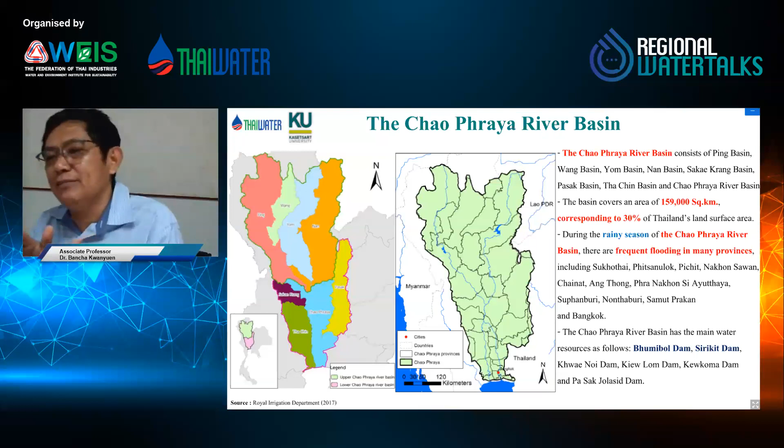The total area of the whole basin is 159,000 square kilometers, and you can see it's 8 major river basins combined together to form Chao Phraya.

In terms of rainfall here, it's about 1,000 or a little over 1,000 millimeters per year. That's not so much compared to the average rainfall of Thailand, which is about 1,300 to 1,400 millimeters. Over the 8 basins combined to be Chao Phraya, the rainfall is not so much different.

But if you look at the runoff, you can see that the Nan River contributes a lot, about 7 billion MCM, million cubic meters. That's a lot. And the next one, in pink, is about 11 billion MCM.

That is a major tributary that keeps the water. The other ones combined still don't contribute so much water.

Next, that is about the supply. This is the demand side. The lower one in brown color is the demand side, which you can compare here.

You can see that the supply side comes from the Nan River and the Ping River in the north, but the demand side, shown in brown on the right hand side, is on the Chao Phraya and the Tha Chin. Chao Phraya is Bangkok actually. The Chao Phraya River flows through the heart of Bangkok, then Samut Prakan, and goes to the Gulf of Thailand.

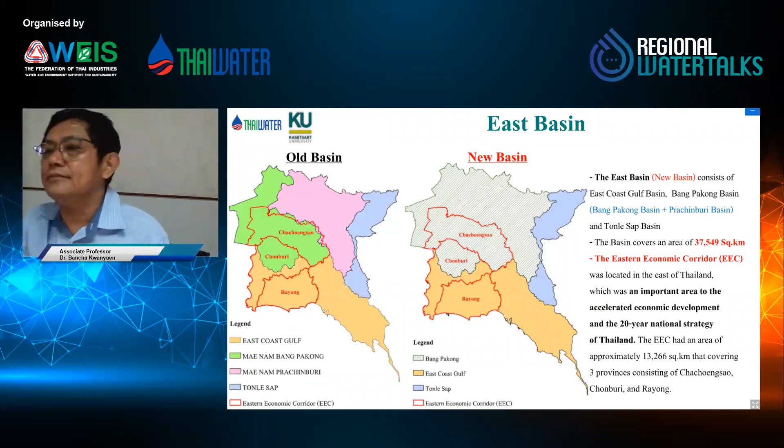This is about the rainfall. Compared to the northern or central part, the rainfall is much more, about 1,700 millimeter per year. The eastern part, Trat and Chanthaburi, you can see in the map shows Chanthaburi, the rainfall is much more there, actually about 2,000 or maybe more. On the western side, that is Chonburi, about 1,000, a little bit more. Not so, but on average it's about 1,700 millimeter per year. The annual runoff is about 18 billion cubic meter.

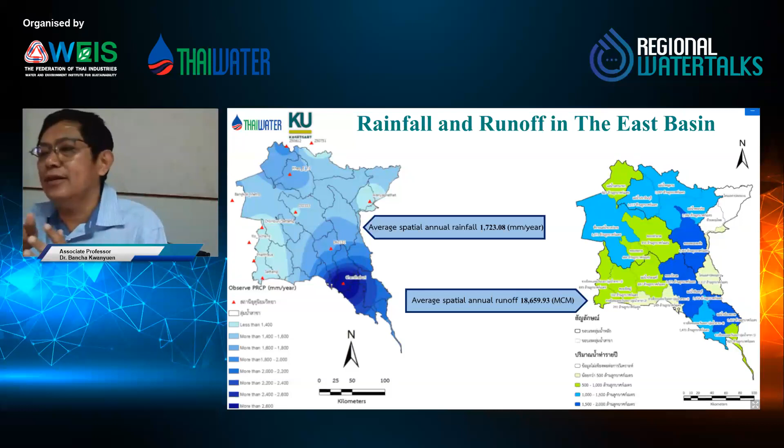Altogether, next please. This is about the water demand. The water demand is different from the other regions of Thailand. Agriculture is about 3 billion. Industry is about 1 billion. Domestic supply is about 500 million, and another 500 million for ecology or natural resources. So altogether we use about 5 billion cubic meter per year.

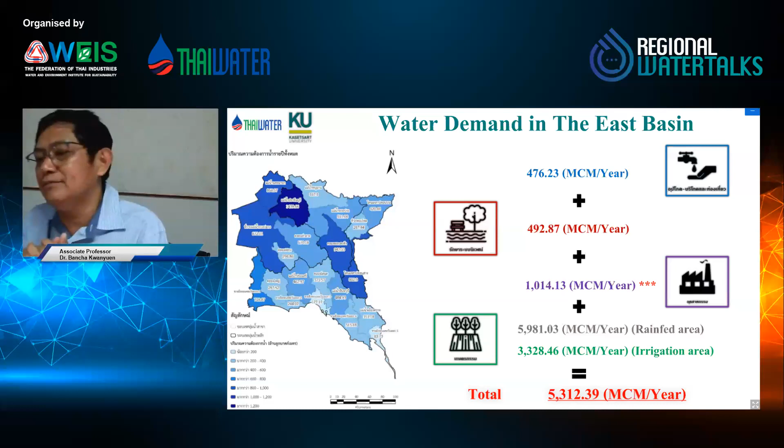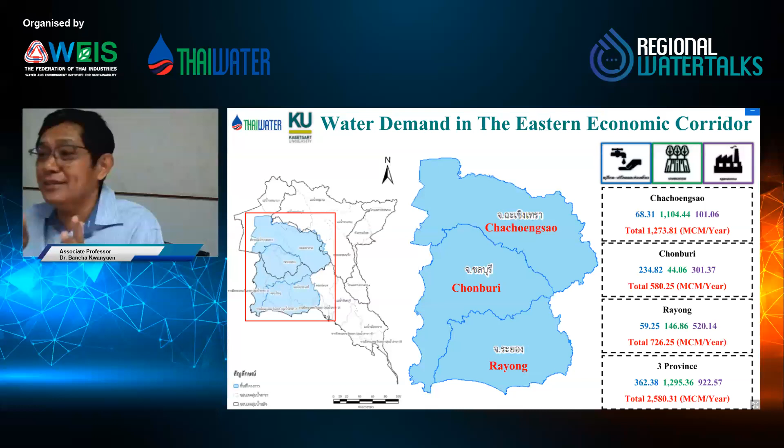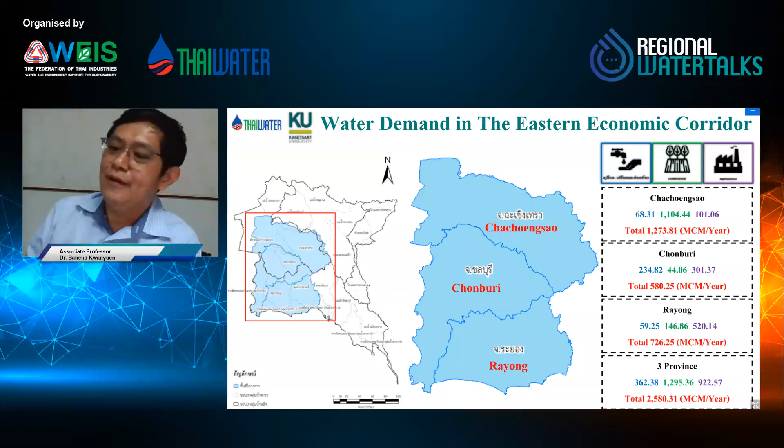Let's talk a little more about the EEC, because I have done a lot of work on the EEC in the last couple of years. Here we give more detail about the water for industry, domestic, and agriculture. Rayong is a good example where industry is very important. It's the highest industry use, about 500 million, agriculture maybe only 150 million, and domestic supply only 60 million. The other one is Chonburi, where industry and domestic supply are not so different, 300 for industry and 234 for domestic supply, and agriculture is less. It turns out a different story where the majority of use is for agriculture, not so much for industry or domestic supply, and altogether it's about 2,500 million cubic meter per year. Okay, next please.

We have a little water shortage in Chonburi, or the East Gulf sub-basin number 1, that is Chonburi or Rayong, but this has been solved by the pipe network. I didn't show you the pipe network here, but actually the eastern part of Thailand, the EEC area, has a very dense pipe network connecting most reservoirs together, connecting the industry area and the urban area with the reservoirs and with another river basin, diverting water from the Bang Pakong and the Chanthaburi area into this area. So far we have no water shortage because of water diversion in this area.

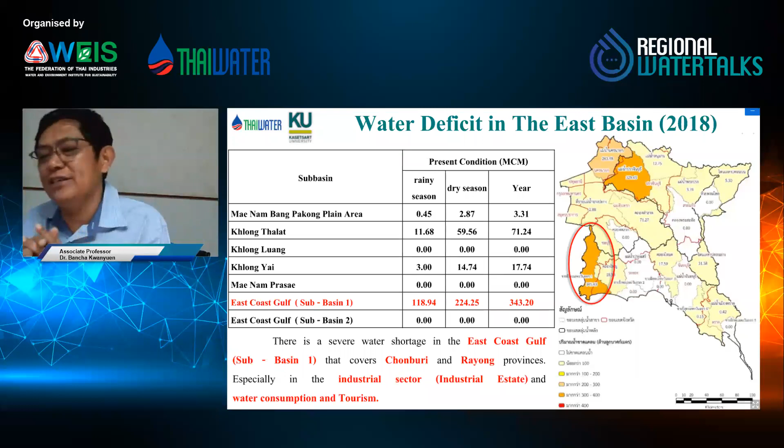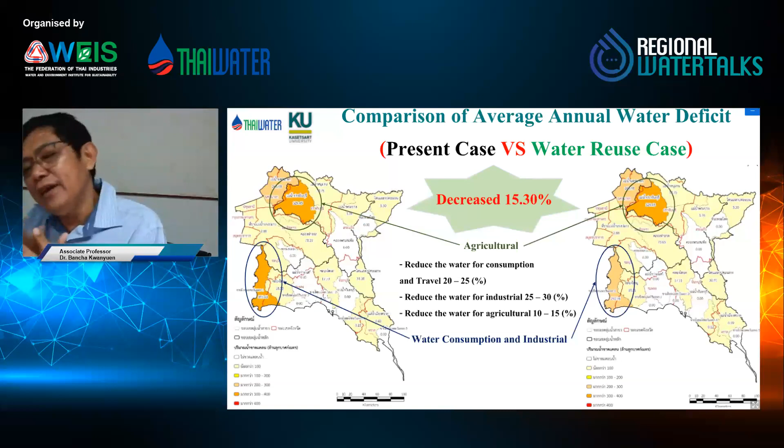That is very important, because if we cannot do this, we have to divert more water from the nearby basin, from the Chao Phraya or from Bang Pakong or from the Chanthaburi area on the eastern side of the EEC, and Bang Pakong and Chao Phraya on the western area. In addition, if we cannot match the supply with the demand, desalination will be another option. We already studied that and have done that, so we have no problem. In the next 5 years, if we cannot really reduce water use, probably desalination will be the solution. Okay, next please.

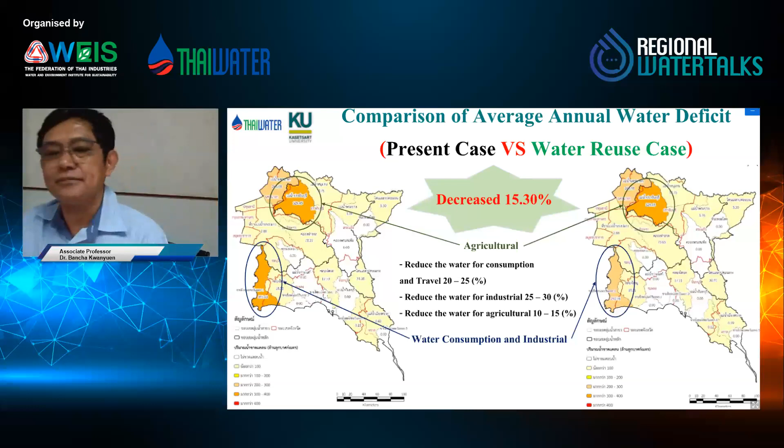Okay, this is moving forward to the north and northeast of Thailand, which has tributaries of the Mekong. You see the Khong, Mun, Chi rivers in the Northeast Khong basin. This area actually has sandy loam soil, so for agriculture it's less suitable compared to the central plain and even the east.

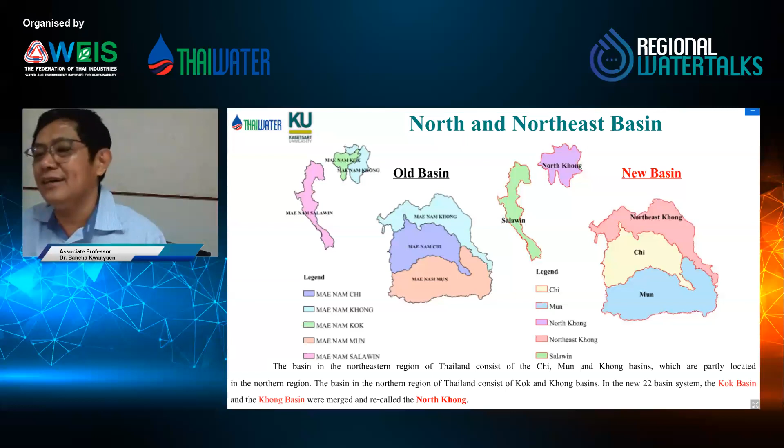But this area has water shortage. Why? Because this area is a plateau, and it's not so easy to construct dams or reservoirs. Next slide, I can show you. You can see here we have water demand and runoff. The demand and runoff seem to be sufficient, but actually we have water shortage, just because we cannot construct reservoirs here.

Like the Mun river, we have water shortage. The Chi also has water shortage. But the Khong may be a little bit better - we can divert some water from the Mekong River, but there's still a little bit of water shortage.

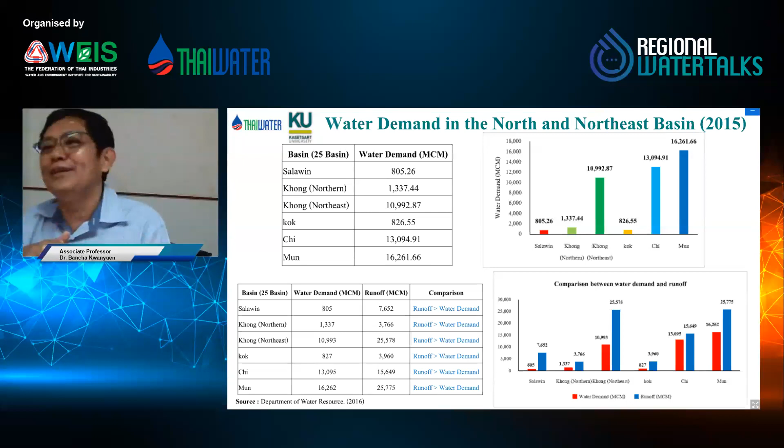Okay, that's most of the north. I didn't talk much detail because it's mostly agriculture. Maybe most of you are more interested in industry, because industry in this area is mostly medium scale or small scale, not so much heavy industry or big industry.

Okay, next please. The southern part is the new movement of Thailand for new industry area. From this picture you can see that from number 18 to 21 to 22, this area has good rainfall compared to other parts of Thailand, because on the east is the Gulf of Thailand and on the west is the Andaman Sea. So it connects to two oceans - one is the Pacific Ocean, the other is the Indian Ocean. That's why we have a lot of rainfall in this area.

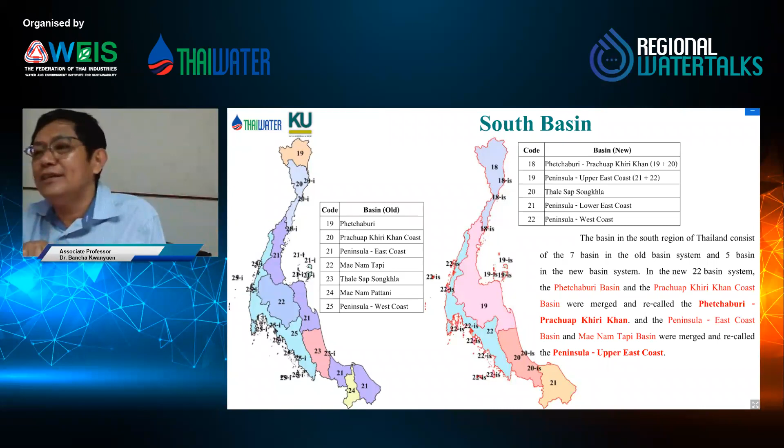And that's why in the future we plan to develop the south to have a bit of industry, and some other area like a port or other things.

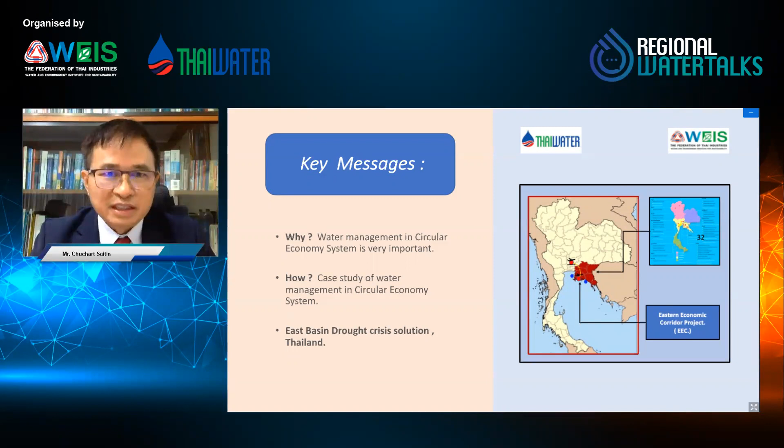Secondly, my message is to share about water management in the circular economy system in the industrial park in the area of the East Basin. The third is, may you understand the solution of the East Basin drought crisis in overall management, that collaboration between the private sector and the government to overcome the crisis in the future. That is all my message, focused on the Eastern area, the Eastern Basin.

Next, I'm talking about the East Basin. You can see that in Thailand, there's increasing demand. In my view, we have many projects developed by the government that promote industry and tourism, to raise the income level of Thailand from a middle income country to a high income country.

These projects include developing the Suvarnabhumi Airport and U-Tapao Airport, to increase capacity. There are two deep sea ports in this area, the Laem Chabang deep sea port and Map Ta Phut deep sea port, with a high-speed rail connecting Don Mueang International Airport, U-Tapao, and Suvarnabhumi Airport together. All these projects will result in increasing population demand in water consumption in this area in the future.

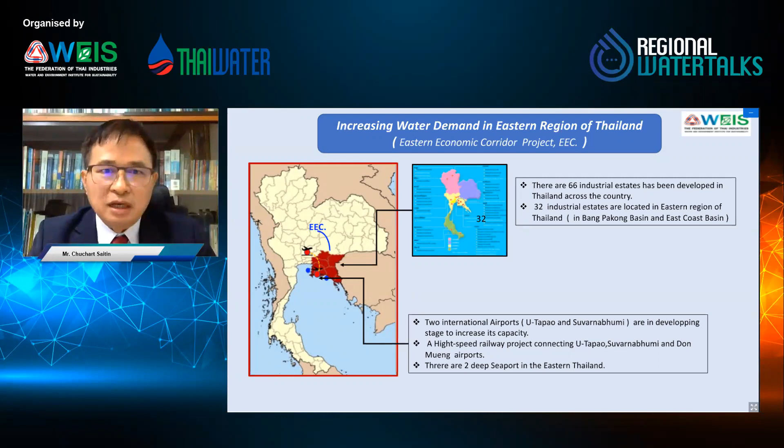This is, in my view, why water demand in this basin will increase a lot in the near future. Please go to the next slide.

Talking in terms of the supply side, I'm talking about the annual rainfall and cycle of drought crisis in Thailand. I started working with Amata Corporation to develop the industrial park since the year 2001. Actually, this industrial park started development 10 years before I joined this company.

But in the year 2005, after the first drought crisis happened when I came to join this company, it was really bad, because in the middle of the year, the stock of water in storage became only around 10 or 20%. It almost ran dry, but that year the rain was forecast to come another 4 or 5 months later, in September.

So that was a very, very severe crisis in 2005. You see in the chart, this is the record from the meteorology station in Chonburi; the focus area shows that every 4 or 5 years, the minimum rainfall will come back as a cycle of drought crisis in this area. So that made me have a point of view that we have to overcome this crisis in terms of long-term prevention.

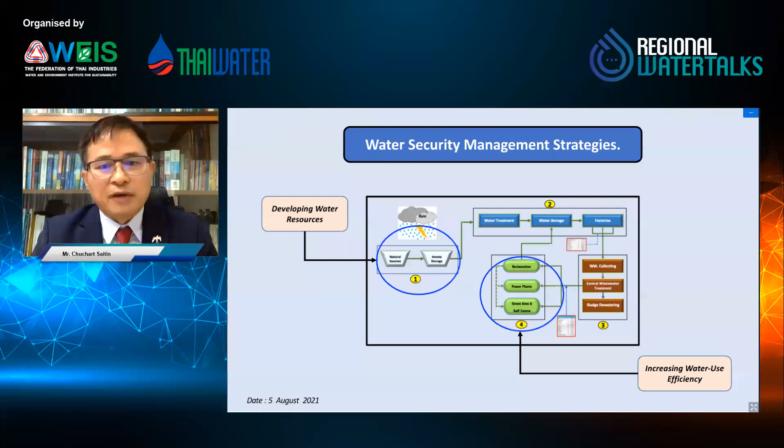We go to the second strategy. As Dr. Bancha told in the previous presentation, the way to have more security in the eastern part involves driving water demand with many projects from the government. So we have to survive by increasing water use efficiency in the industrial park, which I will explain next.

Next, the first strategy: water resource development plan. In this plan, we studied the kinds of water sources we can develop for industry. The first is surface water, which has the lowest cost of water use. Second is groundwater, which is very limited in quantity in eastern Thailand. It was just studied that there is only a big basin in the Ban Khai district that is not yet developed, but the study shows there is a big basin there.

Third is to increase water use efficiency, which we are using currently. In this time, the water safety solution system involves investigation and study by the government sector to develop a desalination system, seawater desalination, to make the highest security for all sectors in eastern Thailand.

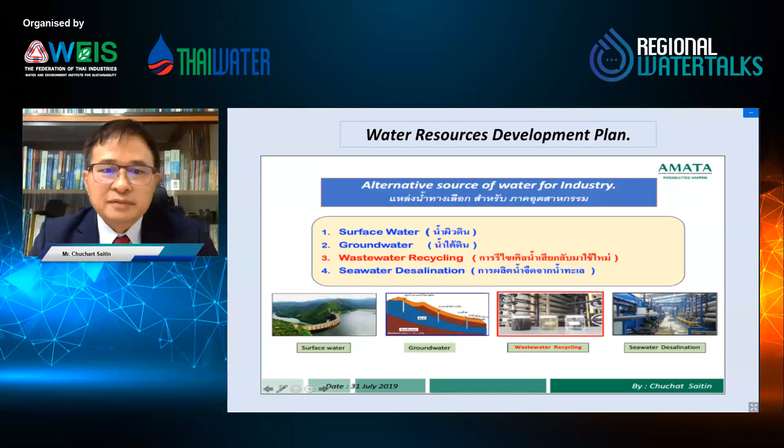Next. At Amata, the transition of water management to a circular economy system increases water usage efficiency. In the past, before we faced the drought crisis, all industrial parks generally managed water under a linear assumption.

The system draws water from water resources, produces, treats, and passes it to the customer. Then the customer in the park will discharge to the central collection system. Wastewater will go to the central wastewater treatment system and be treated to comply with the standard of water discharge to the public canal, throughout Thailand.

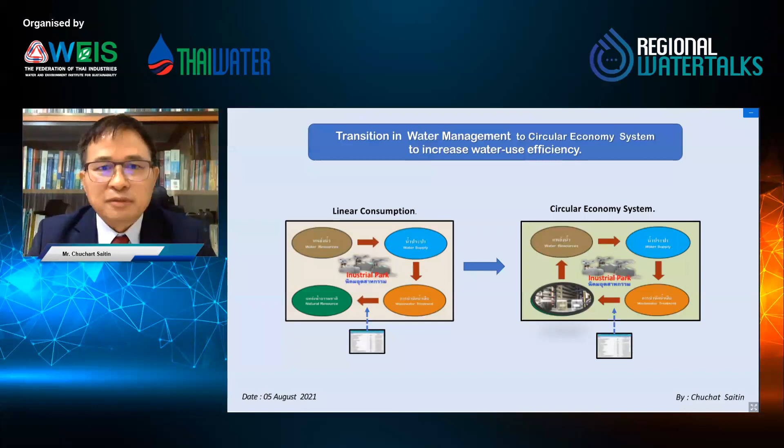Besides this, we were thinking about how to achieve high security of water management for all investors. So we changed the system into a circular economy system, where we collect all the treated wastewater into the wastewater reclamation system, using a reverse osmosis membrane system. This system produces water to supply back to the industrial park again. Let's go to the next slide.

We studied the record over 10 years of statistics and found that in Thailand, in two industrial estates - one where all wastewater is collected by the central collecting system - the amount of wastewater is 44 to 58% in Chonburi, and at Amata Industrial Estate in Rayong, it's almost the same, 44 to 61%. This is for industries like automotive, electronics, and coating. The amount of water discharged from the factory that goes to the recycling system averages about 50%.

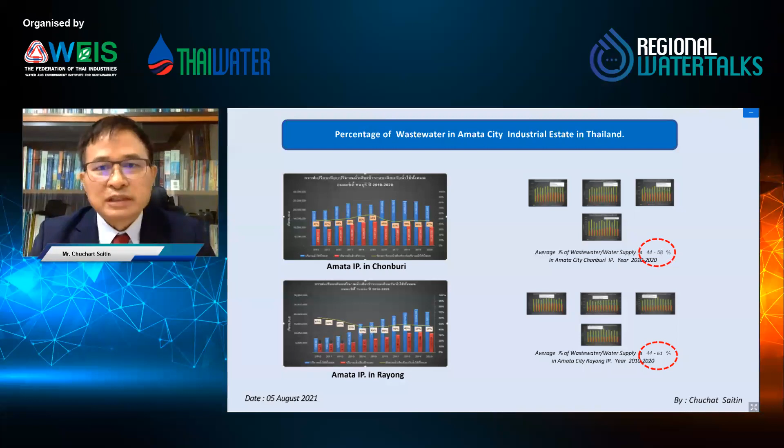Okay, next. In the wastewater management system, we started this way because in an industrial park it's easy to manage all the factories, since all factories investing in the park have the same system. They have to design the factory to separate rainwater from usage water, which we call wastewater. All wastewater is designed to collect and discharge at only one point to the central water system. This design is controlled by the Industrial Estate Authority of Thailand, which we call IEAT, and must be approved before getting the license to operate.

When operating, Amata has a system to do random sampling, checking the quality of discharge before it goes to the central collection system. This ensures that all wastewater is controlled to meet the requirements of the central wastewater treatment system, which we design to handle and treat until it meets the standard for discharge to the public canal. We then recycle this water to the cooling system in the power plant and to the green areas in the park. The rest goes to the RO reclamation system and is supplied back for industrial use in production.

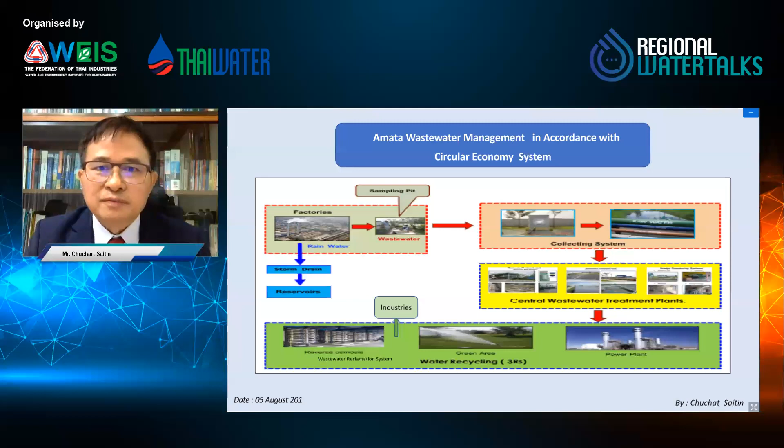Okay, next slide. This is the program I'm showing you in the model, which is resource management. We draw water from natural resources, and we also have reserves at Amata to keep water for the whole year.

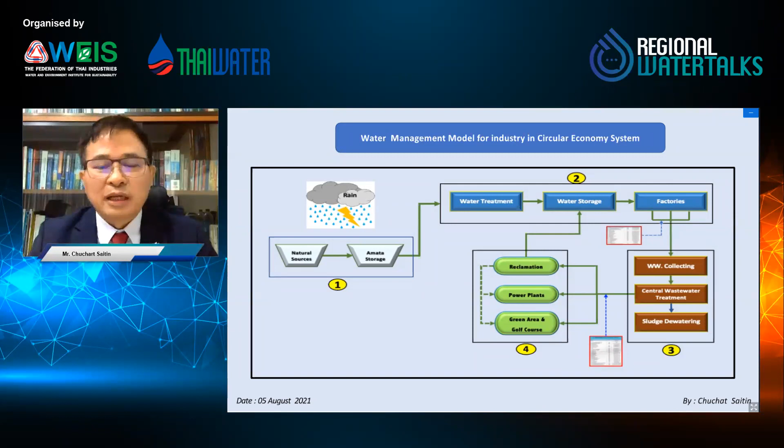This part is about increasing capacity and the efficiency of water use, reusing by integrating wastewater from the central wastewater system into the green area, the power plant cooling system, and then into the reverse osmosis reclamation system to supply high quality water for industrial use. This is the system that we plan to do. Please go to the next slide.

This is a sample of one station of the wastewater reclamation plant in Amata Industrial Estate. This figure shows the whole system. The water goes to the wastewater treatment system, and the final stage is the sludge dewatering system to remove sludge from the treated wastewater. All treated wastewater is pumped to the holding pond before being recycled for use in green area systems and power for the cooling system.

The water, second, to the treated water that we use for the RO reclamation system—the quality of water is very clean, better than the PWA standard. Normally PWA standard has turbidity control at 4, but the water that feeds into the RO membrane has to be less than one unit turbidity, so it's much better than the standard of PWA.

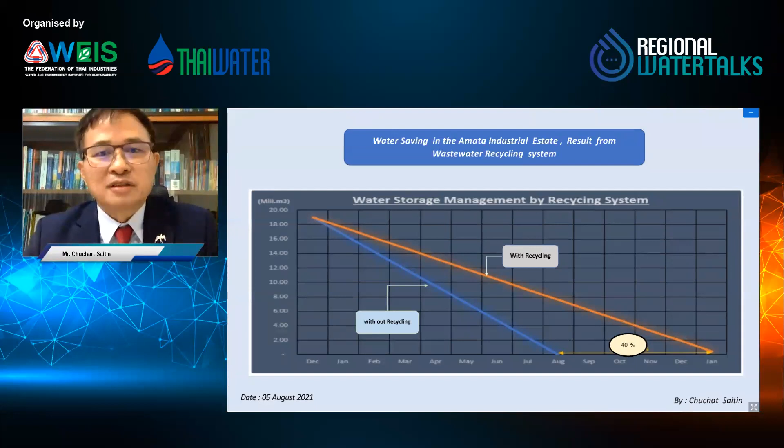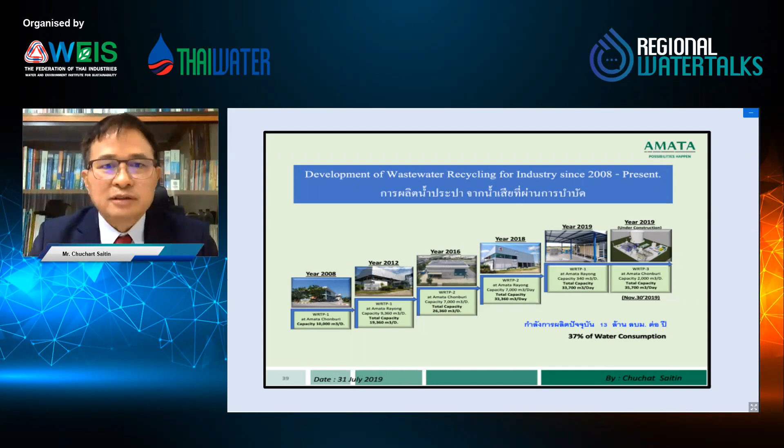This is the model I presented to the subcommittee of the House of Representatives for water crisis management in the eastern region of Thailand, to find solutions for the water crisis on the east coast. As Dr. Bancha said, we need collaboration between the private sector, government sector, and all sectors—including agriculture, private domestic consumption, industry, tourism—they have to be aware of the water crisis, its cycle, and how we can overcome it. Water usage efficiency improvement is one key success factor for solving the water crisis.

Because when we look at seawater desalination, it has high cost—consuming around 4 times more electricity for 4 times less water. Recycling water needs around 0.8 to 1 kilowatt hour per cubic meter, but in seawater desalination—based on my experience visiting Israel, Singapore, and Australia, where they do seawater desalination—the average is around 4 kilowatt hours per cubic meter of desalinated water. So we have to improve water usage efficiency before moving to seawater desalination systems.

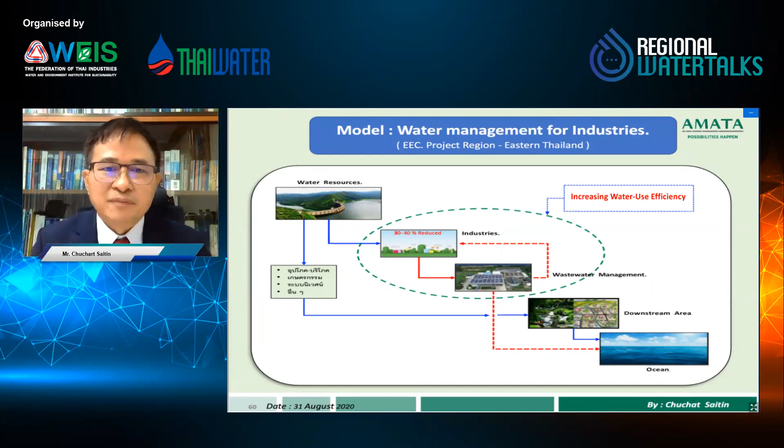I think this is coming to my last slide. I just want to tell you that we have the highest security system through the government—they have an official water resource body, the National Water Resource Agency, to manage the overall policy of water management in Thailand.

We also have a subcommittee to determine how to implement seawater desalination in Thailand for the highest water security in the eastern part of the country, supporting all the government's projects like developing seaports, increasing international airport capacity, and high-speed trains—all driving demand. But we have to ensure a mitigation plan to overcome the crisis by improving efficiency of water usage in all sectors.

In agriculture, we have to reduce losses in the distribution system. In industry, we have to implement the 3R system and circular economy to reduce water consumption. The private sector has to control demand and wastewater discharge into water resources that can be contaminated, reducing supply capacity. So the final key success factor is collaboration and public awareness of the crisis in this region of the country.

I'm going to spend today with you telling you more about this process, how it works, what the costs are, and what the standard issues are. But before that, it's good to zoom in a little bit on the problem at hand. We're a Dutch company, based in the Netherlands, in Europe, but we're globally exporting and currently active in around 20 countries. I think there's a good match here also in the Asian region, because when we look at water supplies these days, it's becoming less and less obvious that there's reliable access to fresh water. There's already 4 billion people that face water scarcity today.

And this number is only growing by nature. To me, access to water is the biggest challenge for humanity in the 21st century. They don't call it the oil of the 21st century for nothing.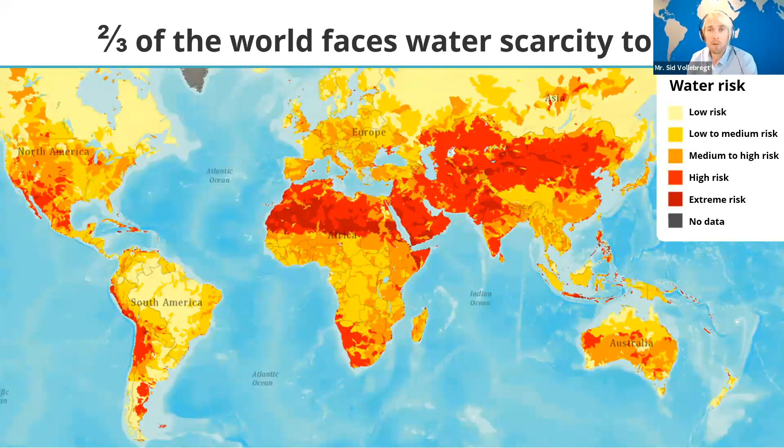It has to do with the increase of population. Of course, we have more people that want more water, they drink more water, but it's also in the food that we consume. Basically, food is 70% of our water footprint - to grow the coffee beans we consume in our coffees, or to grow the wheat that is eaten by the cow to be turned into meat. So it's not only the water we drink, but also the food we eat, the clothes we wear, the energy we produce, and all the products we have.

Currently, we use around 4 times the natural water cycle to provide all the people with enough water. That means all our natural water reserves are highly under pressure. Aquifers are dropping and salinizing, and wetlands are quickly disappearing. That's a big issue.

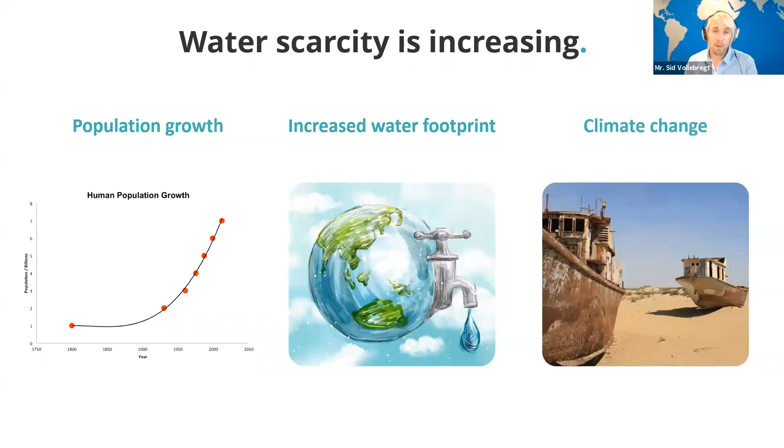And last but not least, there's also climate change that changes weather patterns. So we have longer droughts, and we have very strong rainfall in a short period of time, leaving the earth unable to capture this water. These three trends together make water one of the biggest challenges for the next decades.

But of course, this doesn't portray itself directly on people. When you think about how people are involved in this global phenomenon, it's often these kind of news headlines that make it evident that these days it's not a question anymore if there's going to be a drought in the dry season, but really who's next. There's always California, the Horn of Africa, the south of Europe, Taiwan was hit recently, Australia, and a lot of regions in Asia that are very pressurized when it comes to water supplies.

But fortunately for us, if we look at water availability, 70% of the earth is covered by water. From all this water, only 3% is fresh water, which means 97% of all the water is salt seawater. So looking at these numbers, we believe that the key to extra water resources partly lies in the sea.

And this brings us to desalination. Desalination is nothing new - it's been done for decades, but it's considered expensive because it's a very energy intensive process. And when energy is expensive, the water automatically becomes expensive. It's a process that has the perception of being fossil fuel driven, a bit dirty, because when we use fossil fuels for desalination, this also means we are accelerating water scarcity by increasing droughts. So we find ourselves in a vicious circle.

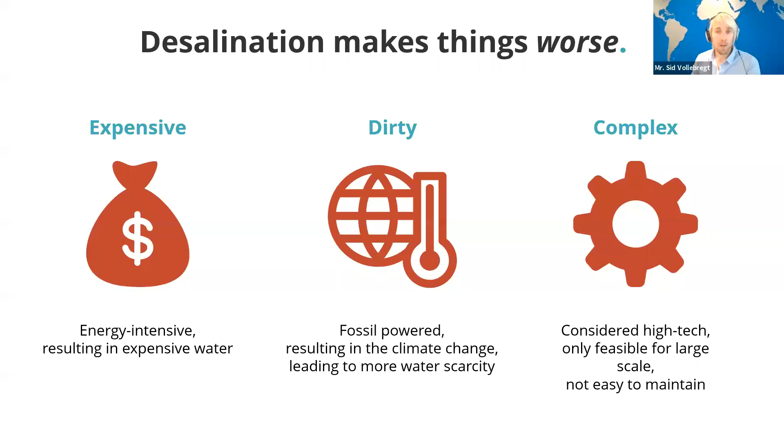And last but not least, it's also a process considered to be very complex, only feasible at large-scale factories in, for example, the Middle East, not being easy to maintain by smaller projects or local communities. These really are the 3 challenges that we as an organization took, and we asked ourselves: how can we get fresh water today without limiting tomorrow? This is the origin, this is the philosophy, these are the grounds of our organization.

And what we did is we developed new desalination technology that makes turning seawater into fresh water much more efficient. Normally when desalination is mentioned, we talk about reverse osmosis, which is the most energy efficient membrane-based process. It works by putting seawater under high pressure, 50 to 60 bars, and then having fresh water generated as the H2O molecules travel through the membrane. For this process, conventionally and traditionally, you need around 10 kilowatt hours for a cubic meter, and that's a lot of energy, of course.

And by doing so, we are able to use 75% less energy. We reuse the saltier water flow, we take its pressure, we provide it to the pump, kind of like a turbocharger. This allows us to use only 3 kilowatt hours for a cubic meter of water - that's 70% less energy.

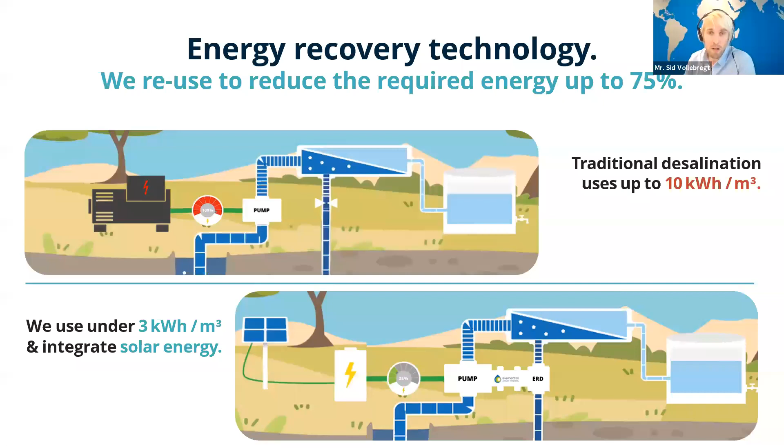The second step we do is we integrate this water treatment process into the fluctuating nature of renewable energy such as solar energy. So we are able to use the sun with a small battery bank to power this desalination process in off-grid locations. And due to this innovation, we also need 70% less panels. That's what makes it a major breakthrough, making freshwater at coastal locations possible for everybody these days.

So what we offer with our solar desalination technologies is, first and foremost, water at lower expenditure. When you have to transport water, it can be very expensive, so what we do is generate water on site at lower expenses. But besides that, we also make sure it's produced in a sustainable fashion using solar energy.

Reliability is very important because you cannot operate a resort, an industry, a community, or a private property without water. So reliability is of utmost importance. It has to be easy to maintain using remote monitoring and durable components - really high grade, not RVS steel because it erodes away within a year, but titanium pumps or 904L, robust materials. Durable components, automation and remote monitoring together are the key for a long-term and sustainable project that saves on water expenses.

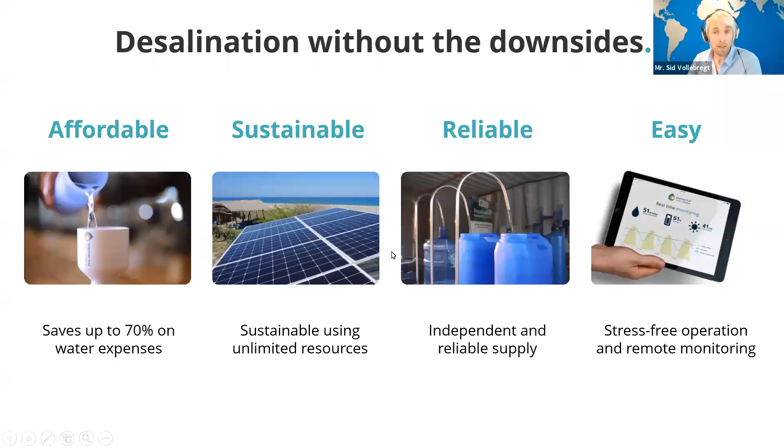So we think there's really a big opportunity here that we are happy to jump onto with the right local partners. When we dive a little bit deeper into the technology, we have 3 types of solutions we can deploy that can generate between 3,000 and 500,000 liters of water per day, so 3 to 500 cubic meters of water per day. That's the sweet spot that our organization operates in.

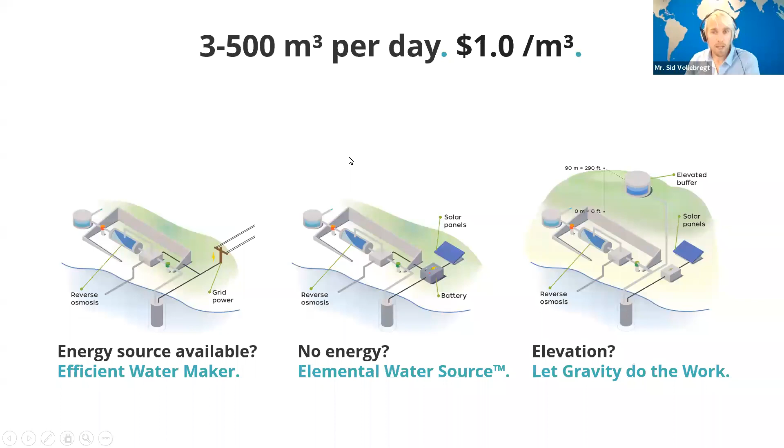We don't do larger plants and we only do seawater desalination, so only coastal applications. For these kind of numbers, you're talking about roughly $1 to $2 per cubic meter of potable drinking water generated. That's the range of investments you have to think about for all of these solutions. We have 3 different solutions that we deploy, so let's zoom into them quickly.

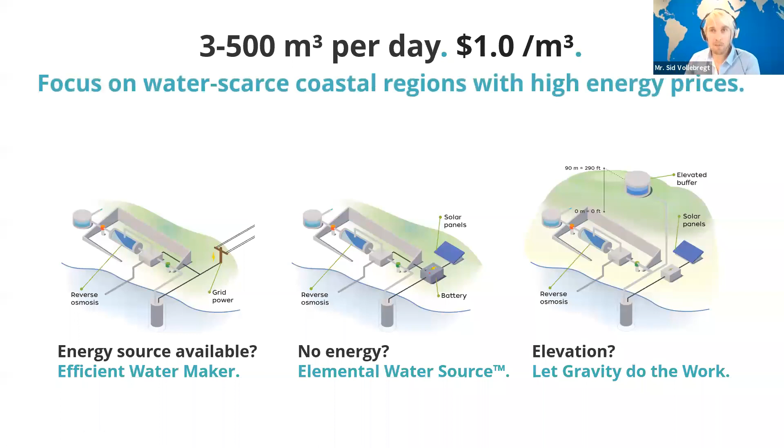They are all in water scarce coastal regions, and the payback is shorter if energy prices are higher. The first solution is only the water treatment part, the efficient desalination range we have. Here we deploy containerized or skid-built units. In the picture you see a project of 90,000 liters per day, the desalination device and the remote monitoring, and they only use 2.7 kilowatt hours per cubic meter.

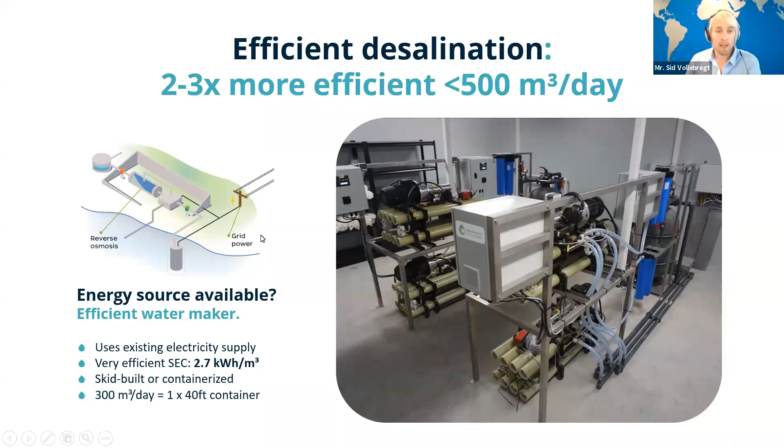This uses the existing electricity supply of the client. So if there's a resort, a community, or a private property that already has reliable and affordable electricity, these are the units we can deploy, either skid built or containerized. We can do 300 cubic meters per day in a 40-foot container.

Looking at the economics compared to conventional desalination, which has the perception of being expensive, here you see 2 lines of investment required over time. The conventional desalination systems have a little bit lower investment required, but because of the energy required, the operational expenses are quite high. Looking at our system, the light blue line, you see the operational expenses are much lower, leading to a short payback and strong savings over time.

You see that represented as well in the water tariff. If you calculate these numbers over 15 years, the amount of electricity for the traditional systems is much higher, so you're looking at $4 per cubic meter. But with our system, we're below $2 per cubic meter. This is for a system of 10 cubic meters per day, one of our smallest systems, suitable for example for a small boutique resort or a small community of a couple hundred people.

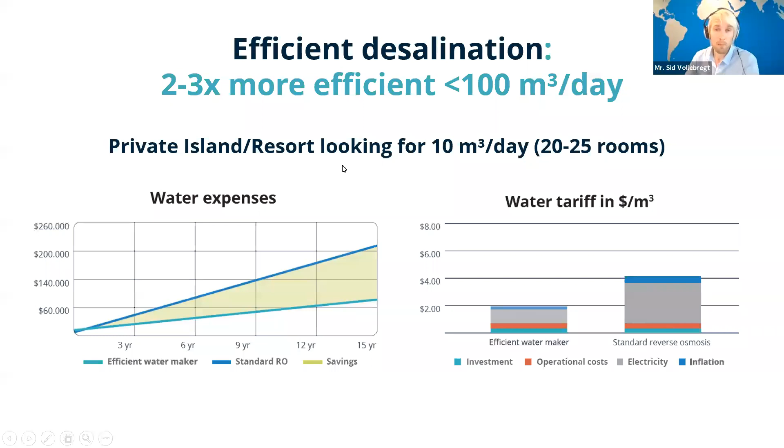When we transfer to locations that don't have a reliable electricity supply, this is the solution we can deploy. This is really an off-grid system called the elemental water source. It's a plug and play containerized unit. Everything you see on top of the container - the solar panels, freshwater tanks, the frame - it all fits inside the container, so it comes plug and play, ready to deploy.

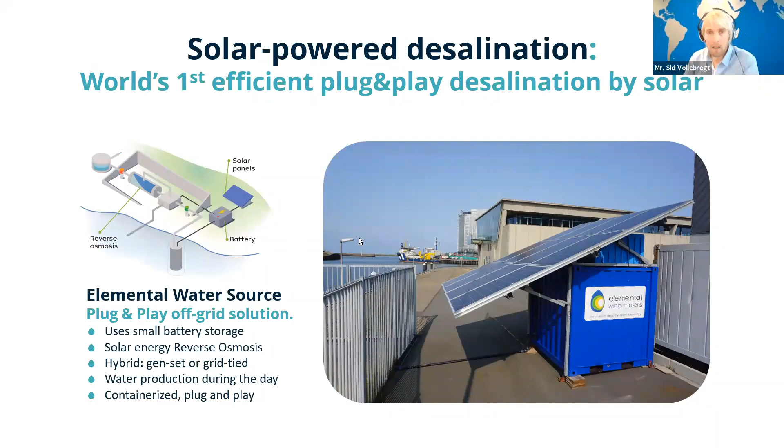I brought a little video with me that shows you a bit more about this process. Let's take a look at this video.

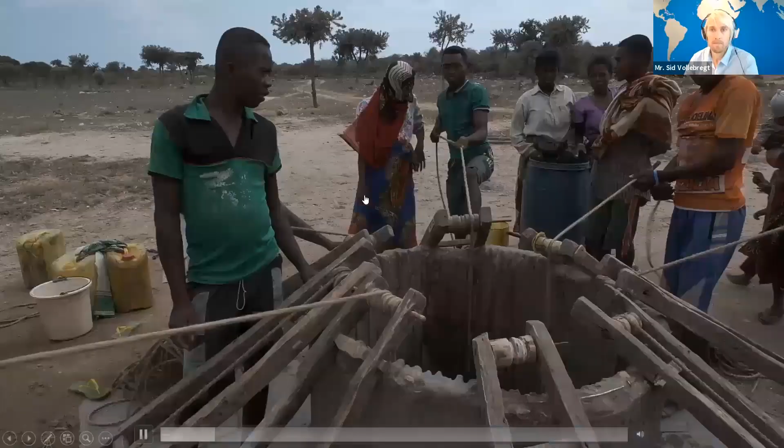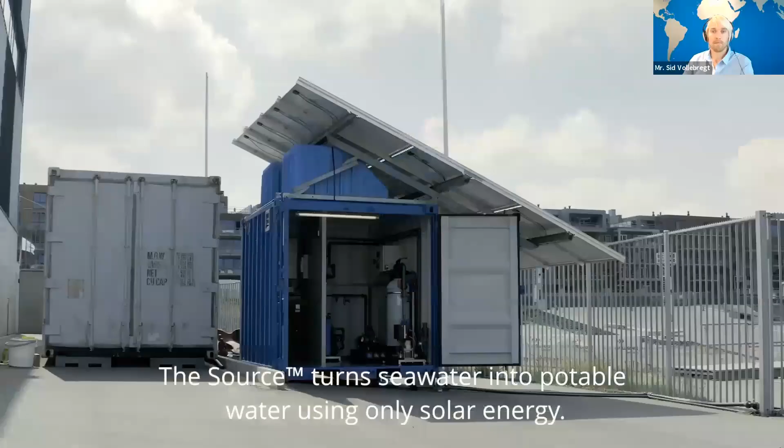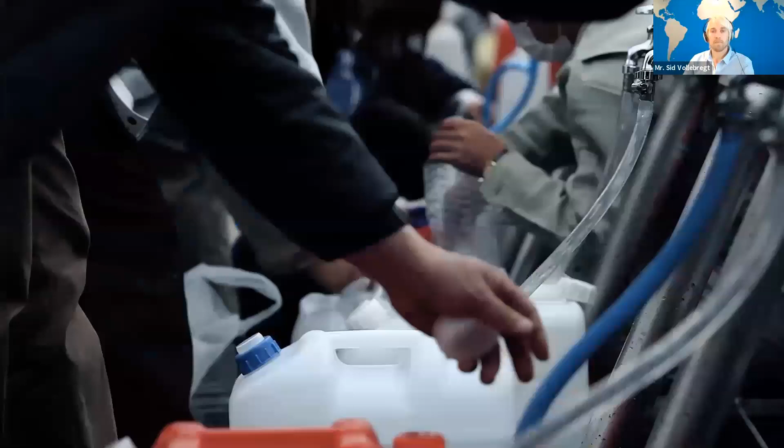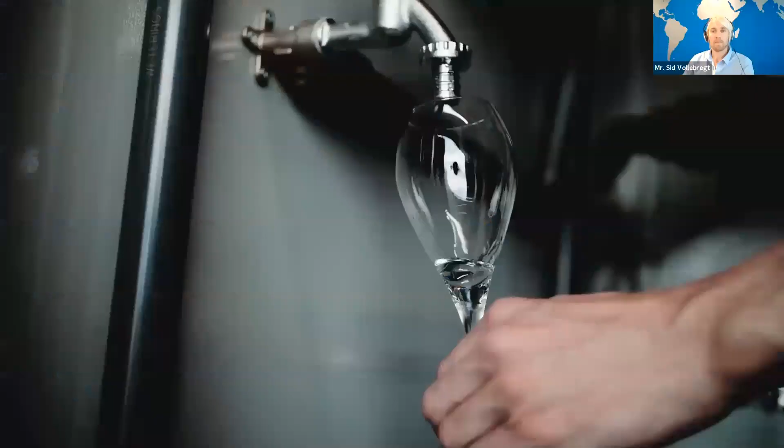Water is the source of all life. However, fresh water is getting more precious by the day. Many islands and coastal areas are facing water scarcity. How do we ensure sustainable access to clean water? At these coastal locations, there are two elements abundant: the sun shines over the vast ocean. This is where the elemental water source makes the difference. It offers an easy-to-deploy water solution for any off-grid location. The source turns seawater into potable water using only solar energy. It's the world's first efficient solar desalination solution suitable for quick deployment. One elemental water source provides sufficient water for off-grid users, such as communities, resorts, industries, or private properties. Due to rapid deployment and ease of operation, it's also the perfect water source for emergency response and disaster relief. It uses three times less energy than traditional desalination through unique energy recovery technology. This ensures that the water can be enjoyed at an affordable rate. Tap into the elemental water source and ensure clean water for generations to come. Join us in solving freshwater scarcity using only the sea, sun, earth, and wind.

So this elemental water source is a containerized off-grid solution. It finds suitable use in off-grid locations, such as for a community water kiosk, but also for temporary applications like emergency response situations after a disaster or a cyclone has hit. It's possible to quickly deploy these units, but for other off-grid applications such as private properties, resorts, industries, or irrigation, this is also a very suitable solution, as long as there's access to the sea, of course.

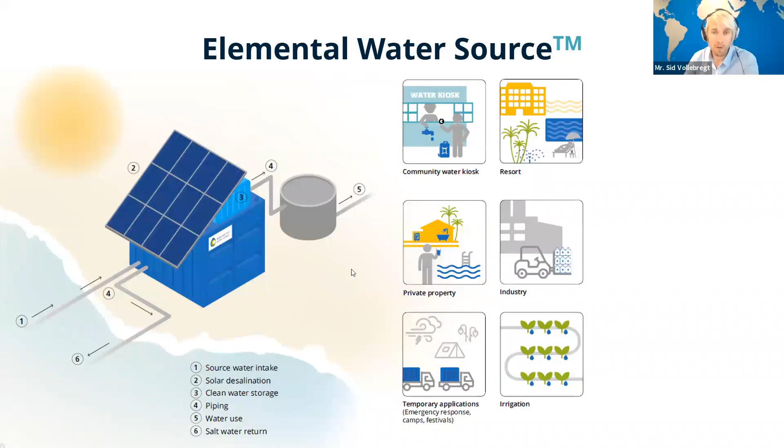As I mentioned, they come pre-built, pre-mounted in a small container. It really depends on the size of the water demand for the clients. We can do small-scale systems like 3,000 or 5,000 liters per day, which come in an 8-foot container. But as the water demand increases to 10, 20, or 40,000 liters per day, the size of the container increases too. So all we need to know for the location is how much water they need and what their location is. This allows us to quote a custom project, designing it while taking into account water quality parameters, the usage of the water, and also the local solar radiation.

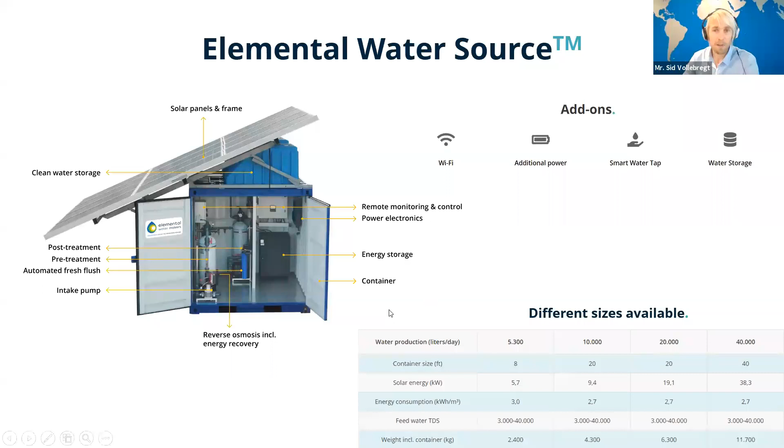So this produces water, but it can also be extended with additional power for energy appliances, smart water taps for distribution, water storage, and also Wi-Fi. This is a very nice application for off-grid locations, mostly for places that are now receiving trucked water, for example through water trucks or boats, or places where people are carrying jerry cans, jugs, or water bottles. Once you start transporting water, it becomes very expensive. So if you are at a coastal location that is transporting water, I recommend contacting us so we can make these kind of cost-benefit calculations for you, because I'm sure the payback is short, and the savings are significant, besides the reliability and independence it offers.

As I mentioned, we already do some projects in the region. For example, in the Philippines, we work together with a local partner, Next Level Water, and with them we are deploying water kiosks. In these water kiosks, people are employed to operate and maintain the system, and thereby they sell and distribute the water, earning their income. So there's also economic growth that can come with such a technical solution.

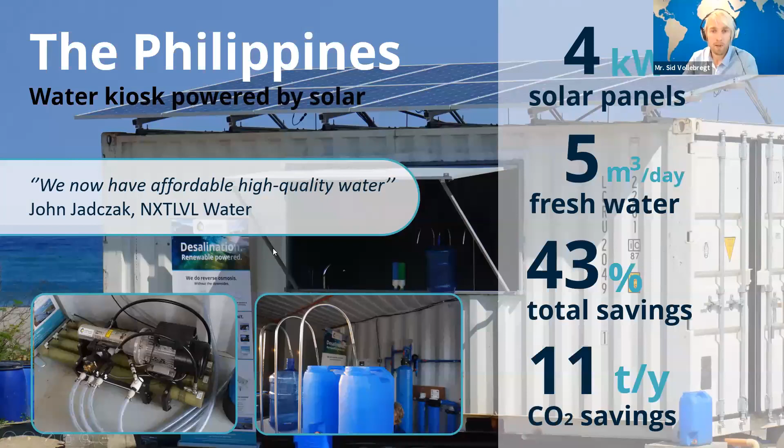So here you see the model, the water kiosk model. It's also suitable for impact investments, also by bundling more projects for more islands, which makes project financing also possible. So these are models that we are also very eager to explore.

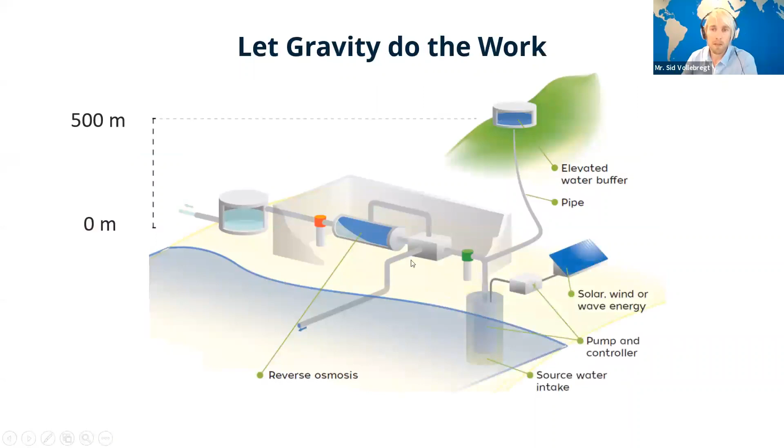And the last solution that we do is a gravity-based solution. So instead of using a battery for energy storage, we use potential energy. We needed 50-60 bars for seawater desalination, so you can imagine if you pump seawater to a vessel of 500 meters height, that provides sufficient elevation for the process. And then if we use a solar pump to fill up the seawater tank, we can constantly desalinate water.

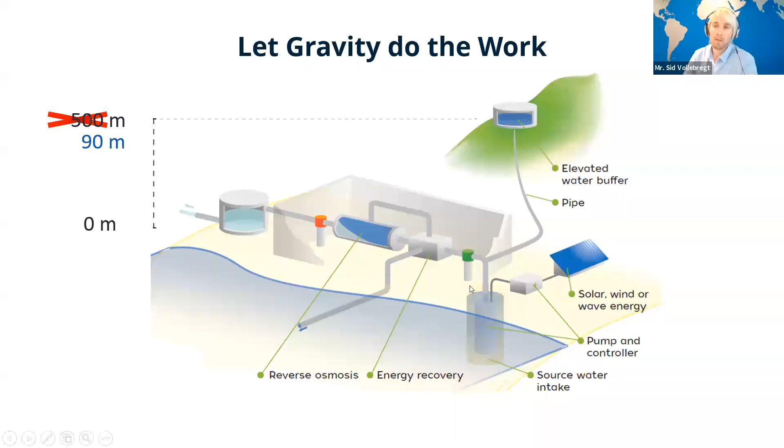And what we did here is we also added the energy recovery part that limited the amount of elevation by 80%. So if there's a hilly coastal region, we can do with 90 meters and constantly turn seawater into drinking water while only using fluctuating energy from the sun. This is, for example, only possible at places with that natural elevation.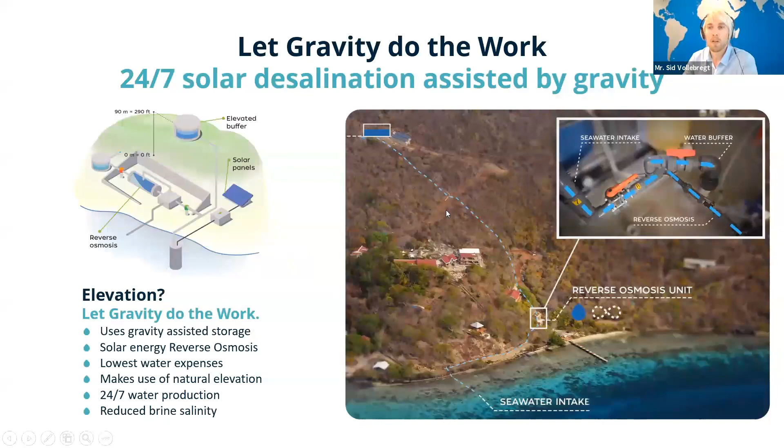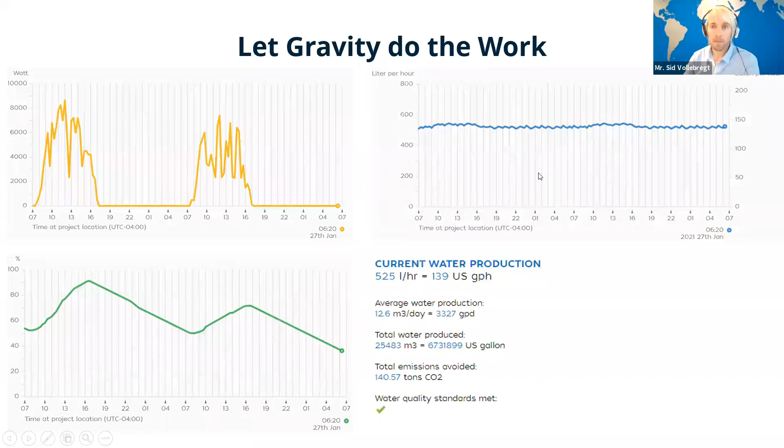This is, for example, a project we did in the British Virgin Islands that generates around 12,000 liters per day. The nice part is that there's no energy conversion losses, so it's really suitable and efficient. You see on the graphs that using only solar energy during the day, sufficient water is pumped up towards the elevated water storage tank. Then by constantly making water with the desalination process, the reverse osmosis, it's possible to provide constant water 24/7 while only using fluctuating solar energy. That's kind of cool, but as mentioned, you do need the elevation in the natural surroundings.

So yeah, the economics here are strong. I think it's good to mention that because desalination always has some negative aspects, it's always about the brine. It's good to mention that when you talk about brine, it's basically the same water as you took from the sea, but then in a more concentrated version.

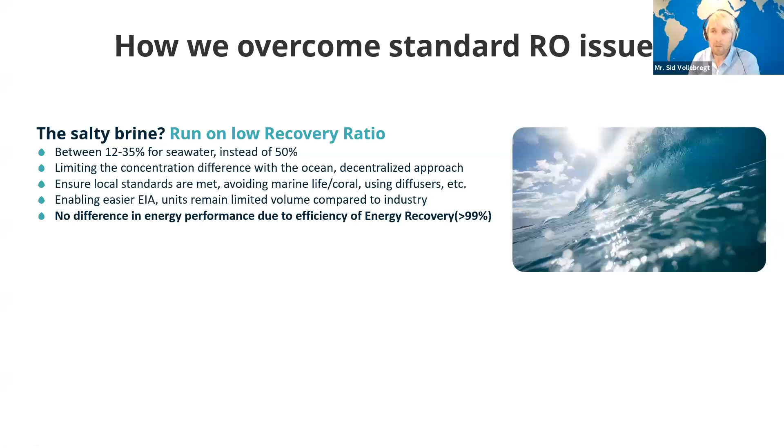What we do to overcome issues with the brine is that we don't use any chemicals. We run on a low recovery ratio, so that the concentration difference between the brine and the original seawater is limited. And we can do that because the energy recovery device has efficiency over 99%. So the brine is of lower concentration, making it easier to return to the sea, and it doesn't consist of any chemicals since we don't use chemicals to clean the membranes.

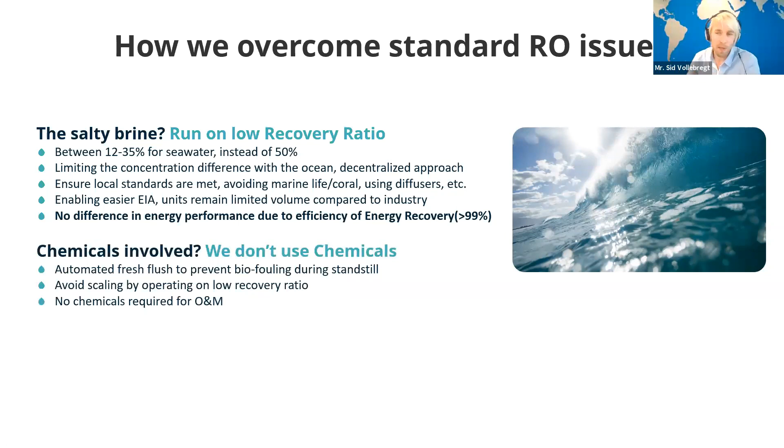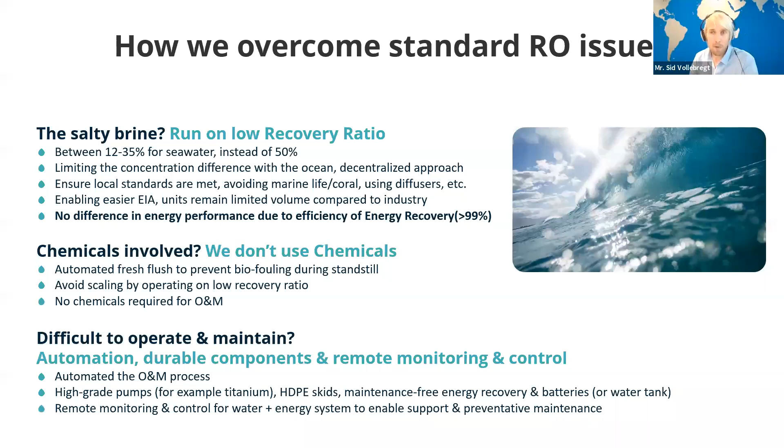There are automated fresh flush cycles involved when standing still, so no chemicals are being returned, it's just slightly saltier seawater that goes back into the ocean. And of course, as we already said, for operation and maintenance we train local people, local staff to operate and maintain, and we work together with local partners to provide support. Then we have remote monitoring, durability and automation integrated into the system.

The last solution we recently deployed is really for emergency response. It's called the elemental water response. Imagine there's a situation where the water supply has been affected by a major event. Before, people had to fly, truck, or transport jugs of water, but what we developed is really portable solar desalination devices. You can see them here. They weigh around 30-40 kilos and can be put in airplanes so they can be ready at strategic locations.

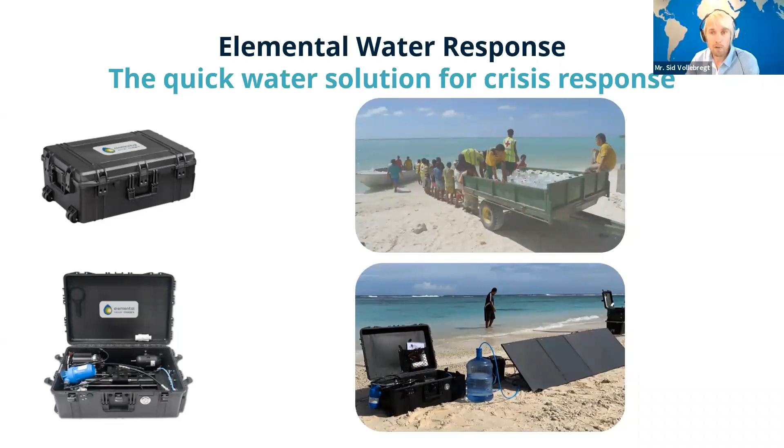One of these cases has the solar energy part, the foldable solar panels, and the other case has the water treatment. Just by putting the hose in the seawater and folding out these solar panels, you're able to produce around 50 liters per hour. This is very suitable when it comes to first phase emergency response. So we are also supplying these to local governments.

So what we say is water for all. We do a lot of work for resorts and commercial properties and industries, but also together with NGOs for remote communities, and with local governments for remote communities that don't have access to safe water, SDG 6. So we are interested to hear from you, what market you would like to work on.

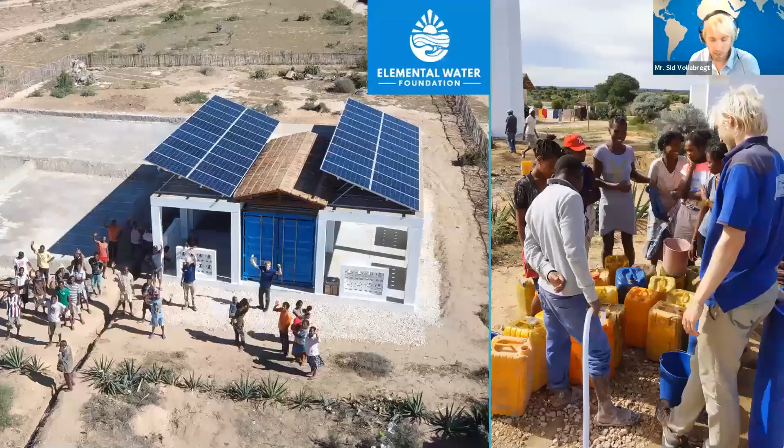I think it's also important to say that we started this project really in Madagascar with the inspiration, and we also started a foundation that brings back water to Madagascar. Madagascar is currently in a very severe drought. A lot of people are suffering, but we have a foundation that donates, raises projects and donates it to the local people there. This is a picture we did 2 years ago for 3,000 people for the water supply, and we're going to do much more of these kinds. So we are very proud to work on this.

So let's work together on that to solve freshwater scarcity using only the sea, sun, earth, and wind. I will be available for questions, and I would like to thank you for your interest and your time. I hope to hear from you. You can contact me using sit@elementalwatermakers.com or check out our website, elementalwatermakers.com. Thank you and see you soon.